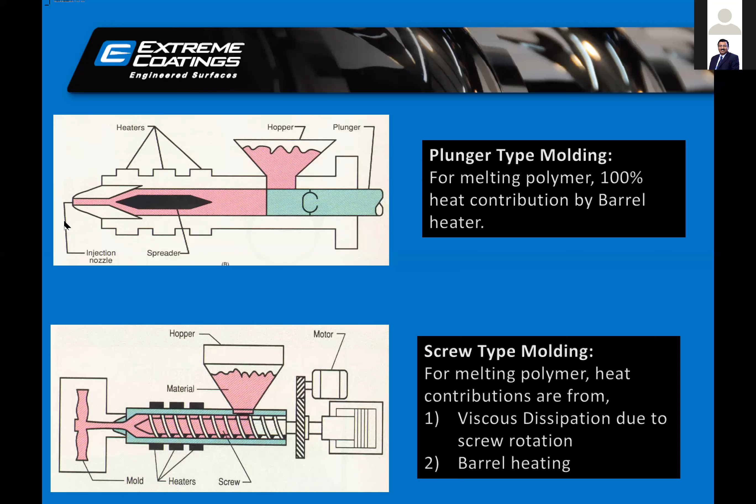Your motors, your drives, everything is subordinate to this system. The whole magic is happening here. It is the rotation of the screw which melts your polymer and creates a quality melt polymer, which ultimately gets converted into the end products.

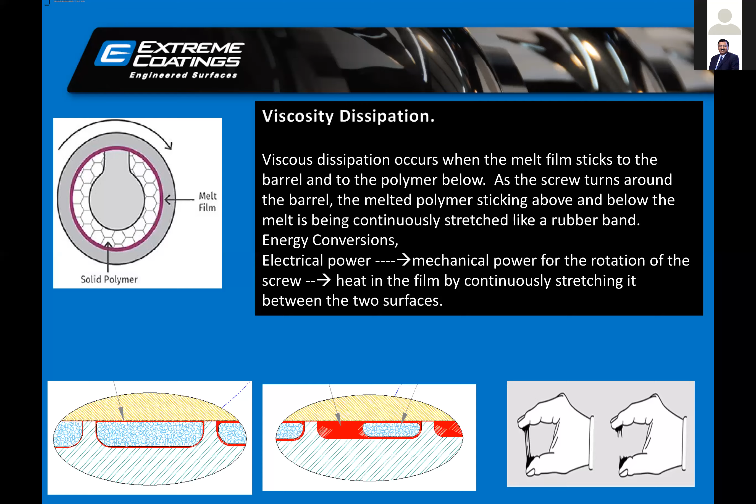Now what is important in these screws and barrels? If you look at the screw barrel system—and I'm just giving you a very standard idea, maybe a different machine supplier has a different formula for it, but this is more in general—if you have a barrel ID, let's say d, the clearance should be the screw barrel clearance. This is where your polymer gets melted. It should be d into 0.001.

That means whatever the ID of the barrel is, you multiply it by 0.001 and you get your clearance. There are two types of clearance, and when you subtract it from your barrel ID, that's where the OD of your screw comes in. So just to brief you, if your screw barrel ID is 30, then the clearance is 0.03. 0.03 into 2, because this is just one side clearance, total clearance will be 0.06, and this will become your screw OD, 29.94.

Now there is a term called critical point. What is critical point? It is the point after which the machine does not give potential profit, directly or indirectly.

What it means is, either your output of machines will decrease, or the quality of melt will not be good. You may end up having black marks, silver marks, or all kinds of issues in the melt.

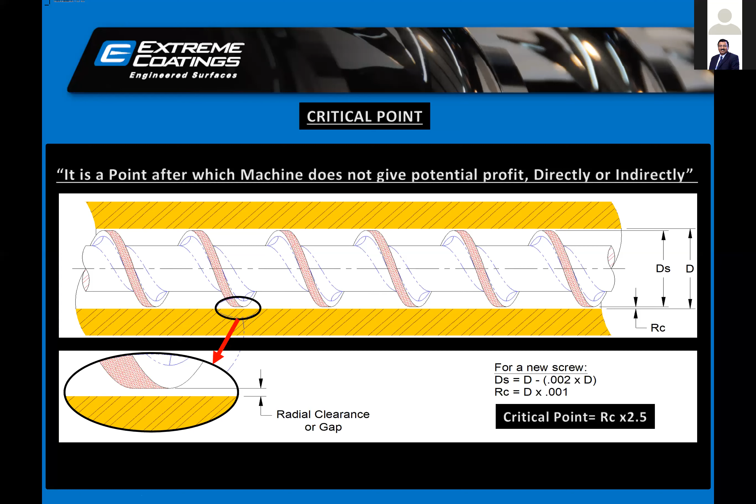So what is the critical point? The clearance which you calculate - once that clearance becomes 2.5 times, you have to make sure you pay attention to your screws, do rectification, or you may have to go for new screw barrels.

So what are the critical points of typical diameter? If your barrel diameter is 30, if the OD of screw or clearance of the screw barrel system is more than 0.07, please pay attention to it, because now your output may get reduced or the quality of melt may not be good, which ultimately will affect your end product's quality. So this is the formula.

And now the question is, why does it happen, why does the wear in the screw barrel systems actually occur?

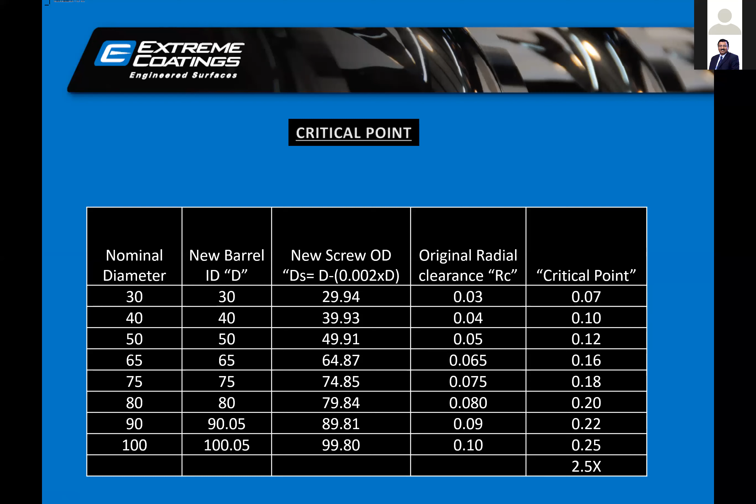So this is what happens beyond the critical point. If you are an extrusion machine processor, the overall output will get reduced. You may have degraded particles or inferior dispersion. In injection molding, you may end up with refilling time more than cooling time, so your cycle time may get increased, and you may have degraded polymer. So we all know all kinds of issues we may face once the screw barrel system is not in place.

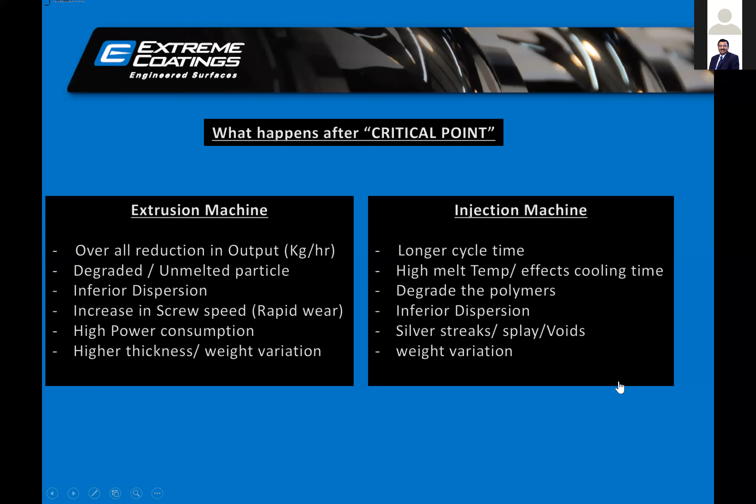I don't want to get into more specifics, but let me brief you about a customer - this is a live example. One of our customers was having a 68/28 twin screw PVC pipe machine, and the target output - when they first installed the machine, the output was almost 340 kg per hour, and they were having a moderate fillers application.

They did not tell us what was the filler percentage in that application, and the screw barrels they were using were nitrided. After 1 year, that means approximately after 8,000 hours of production, the same machine was giving output of 315 kg per hour. So on average, when we calculated the output loss into hours into 365 days, this was the production loss of that particular machine - 98,000 kg, which was actually 3 weeks of actual production of that machine. So almost in a year, almost 21 days the machine was not functioning.

That was the kind of loss that processor was making.

This again is a live example of one chair manufacturing company in Durgapur. Because of the wear, the cycle time of the chair, instead of 45 seconds, became 47 seconds, and almost on an hourly basis they were manufacturing 4 chairs less. And you can always calculate the back end cost and the loss the company was making because of this.

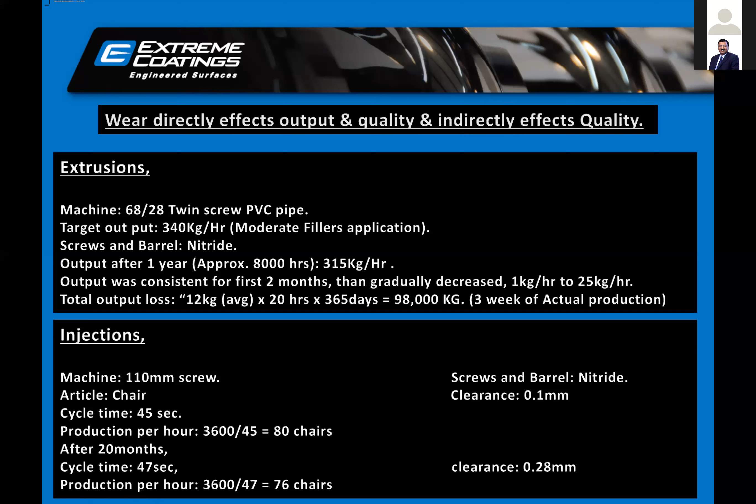Coming back to the wears, we have to understand what are the wears in the system. In plastic machineries, because the system is such that you always end up having a screw assembly as a cantilever assembly - that means one end of the screw is always going to be free - and maybe because of the filler, maybe because of the higher diameter of screw, different heat mass at the systems, it is bound to happen that two metals are going to come in contact with each other.

That's what we call adhesive wear. See, in adhesive wear, when you purchase new screws and barrels, the surface may look very smooth, but in microscopic view, the surface has peaks and valleys, and when two peak points come in contact with each other, because of the higher shear, they create a micro weld.

That's how, if you see specifically in most systems, the wear starts at the metering zone, because that's the area which is more free for movement, and those are the areas continuously in touch with the barrel, and it starts getting ruptured from that end. So most of the time in all these systems - be it injection molding, be it extrusion molding, small screws, big screws - this adhesive wear is always there in the system.

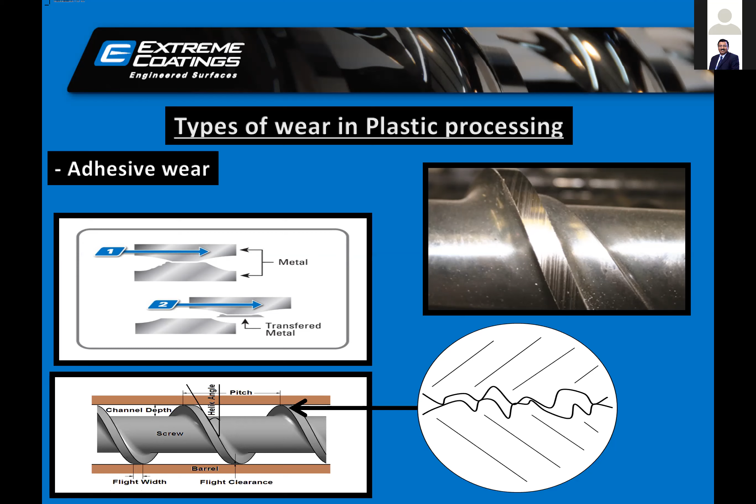There are many reasons for that. As I said, alignment - because it is a cantilever assembly, sometimes runouts on the screws are more, and the deflections could be more because of the weight of the screw itself.

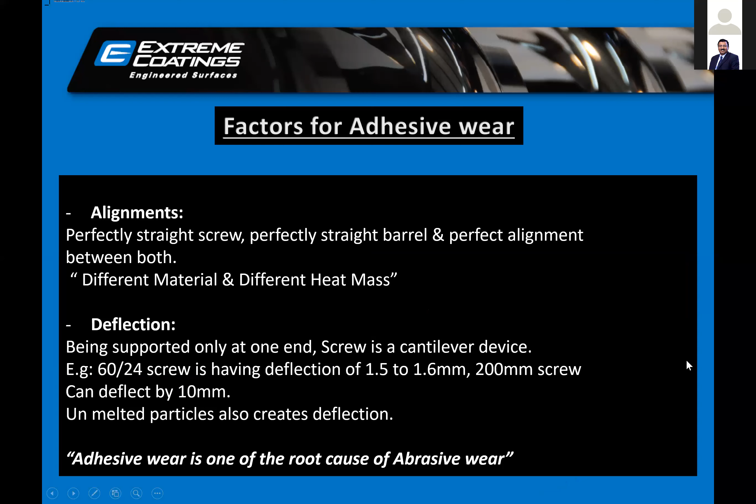Second kind of wear is abrasive wear. This happens because of the fillers and other subordinate materials we have to add in polymers. It could be glass fibers, calcium carbonate in PVC applications. Maybe customers are processing recycled plastics which has lots of dirt and dust, or agglo waste, which is roadside waste - if customers are collecting it, it may have lots of dust particles. Now, what is abrasive wear? When hard particles come in between the screw and barrel, and if the hardness is not proper, then you will see lots of wear on the screws.

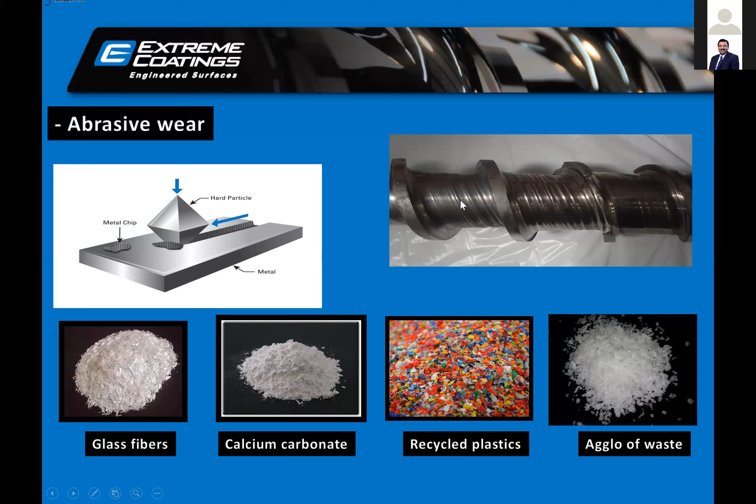Another kind of wear is corrosion wear. This typically happens when you have acidic materials. We usually see this in PVC and CPVC applications where chlorine can attack the base metal. Then in PTFE processing, fluoric acid can attack your base metal. Lots of engineering plastics used in automobiles have halogen-free flame retardant, which is very corrosive in nature and can also pit your base metal.

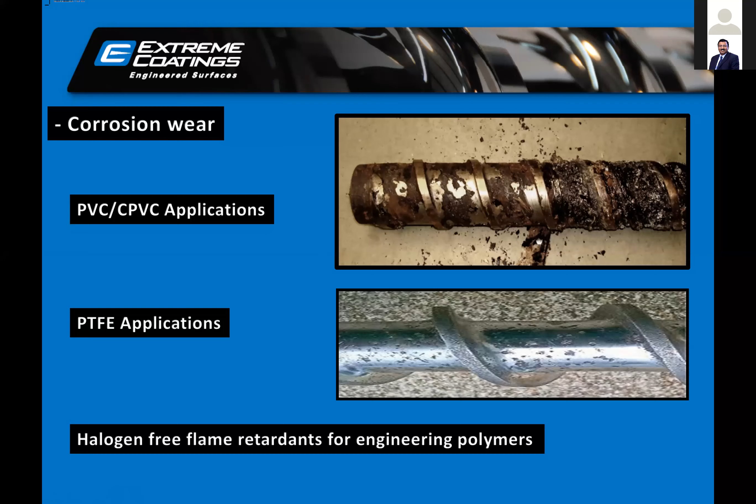Fourth kind of wear, which has come into picture in the last 6-7 years, is called erosion wear. This happens when customers are using groove-feed screws and barrels. If you see simulations of the screw very near the hopper, this extrusion system feels lots of pressure. The sidewall of the screw has so much pressure that within 6 to 7 months the flights are almost gone. This happens in groove-feed systems where very high feed rates generate lots of pressure.

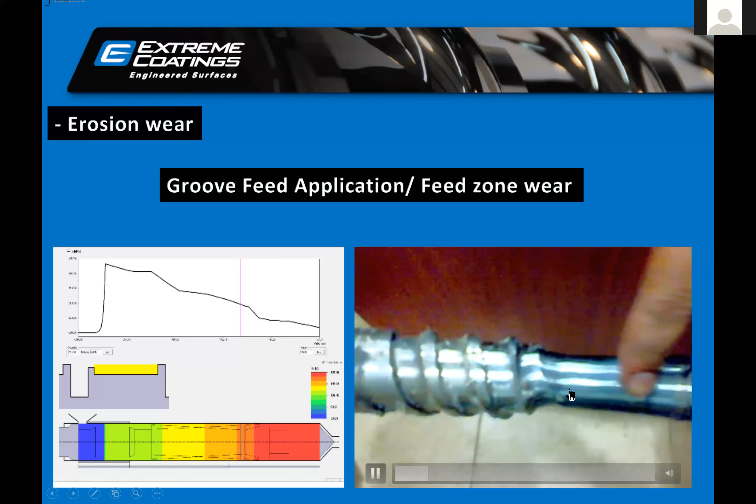I'd like to play a small video here because this is not commonly seen. The real problem is only in the feeding zone. If you see just near the feed zone, almost 3 to 4 flights are completely gone, and this happens because of very high pressure at the feed bush.

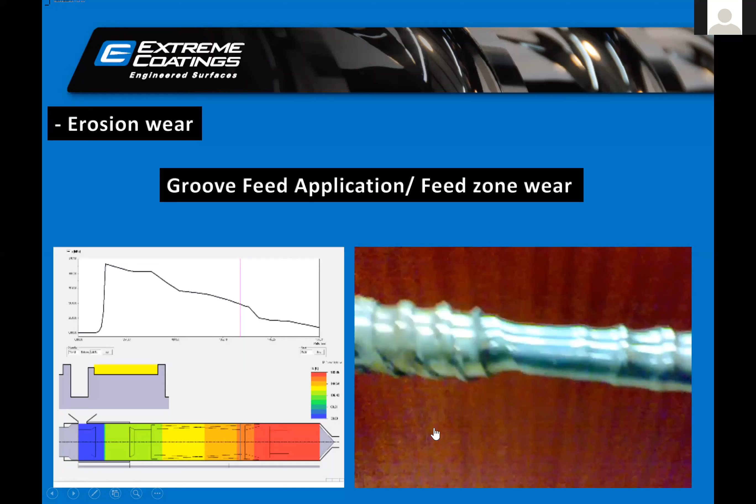I will not run the complete video because we may run out of time.

Now the next slide is basically about what industries have done to combat this kind of wear. There are two ways industries have tried to address these issues. One is with the steel itself. In the 1960s and 70s, plastic processing was not that advanced, but in the 70s in the US and Western markets, the automobile market got such a boom that there was a need to convert metal parts into plastic parts, adding toughness and strength. People started using fillers and similar materials.

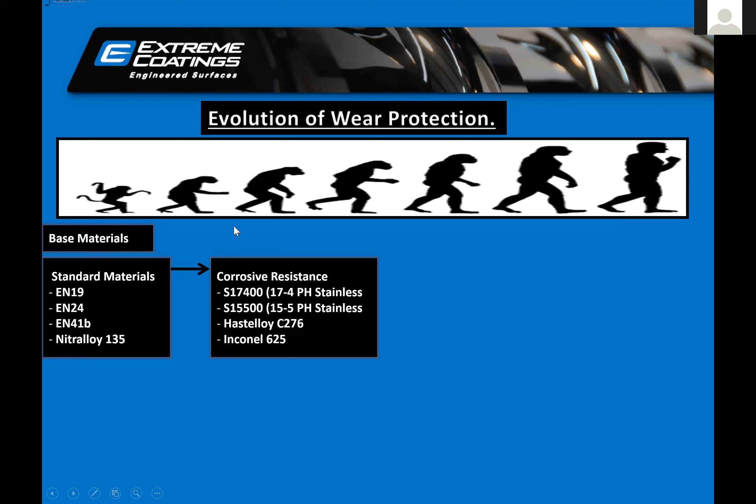In that case, simple steel may not sustain, so some advanced steel came, like 4140, 4143, and you can put some treatments on that. Then there are certain steels specifically used for corrosion resistance - for example, if I want to use CPVC only, there are specific steels you can use to make screws and have a longer life compared to standard material. Then industries started using steels which are moderately good with adhesive wear, abrasive wear, and corrosion wear also.

Those are H13 and D2. And then came very special steels, mainly used in the European market - CPM 9V, CPM 10V. The steel of these particular screws is tailor-made; the technology itself is called crucible powder metallurgy. They make powders of it, and from the powders the steels are made. So this is one way industries have tried to address the issues of wear.

Second way industries have tried to address this issue is by putting surface treatments on the screws and barrels. The very basic one is flame hardening - if you put heat in the steel, it will do something, and there is a technique for that. I'll speak a little more briefly on all the steels as well as the surface treatments.

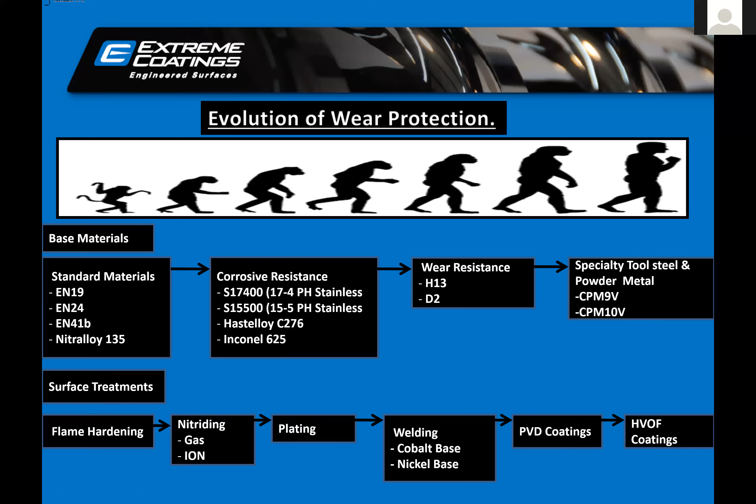After flame hardening, people developed nitriding. After nitriding came chrome plating. After chrome plating came weldings. After weldings, people started doing PVD coatings, and after PVD coatings, now HVOF technologies are available, and we will look at each and everything briefly.

Keep in mind that when you purchase steel, steel is a mixture of different elements, and some elements are very good for steel, some elements are very bad for steel. Carbon puts lots of hardness in steel, but there is a limitation. If you try to put more carbon in steel, it will become cast iron. So there is a limit to this.

Manganese, phosphorus, sulfur, these are all basically impurities we want to avoid. If you have high chromium in your steel, it will become more resistant to corrosion. If you have molybdenum, vanadium, tungsten carbide, those steels are excellent. They give great life because these elements are very good at corrosion resistance, wear resistance, abrasive, adhesive, let it be any kind of wear. These elements help a lot.

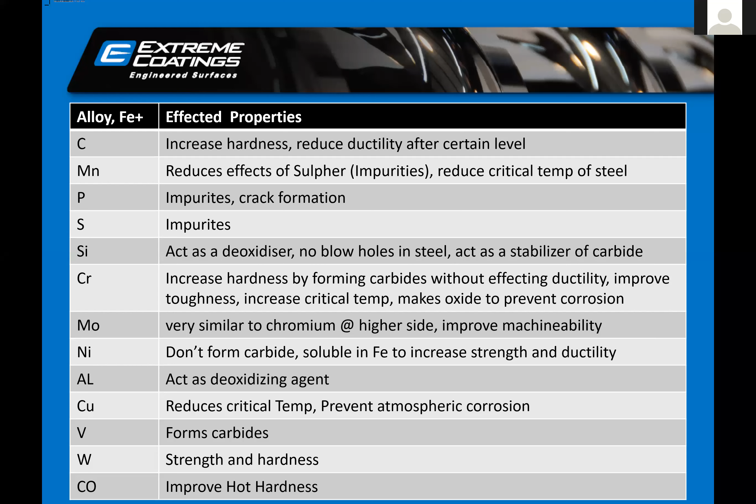When I spoke about standard materials, 4140, 4340, and all those things, in India we call it EN19, EN24, EN41B. 80% of the machines you purchase in India use these steels, and then nitriding is done on those steel. This is very standard in India. If you look at the chemistry, it does not have great wear resistance property. It is just a steel which is ready to accept nitrogen, so it can make a nitride. That's how it creates the hard layer. But this is a very basic steel.

Sometimes you may wonder why one screw maker gives a much cheaper cost for the screw barrel, while other screw makers give you a much higher cost for the same screw barrels. This is because of the material itself. EN41B is almost 2 times costlier than EN19, but the chemistry is very different. So steel may look the same, everything looks the same, the hardness initially looks the same, but the steel chemistry is not the same. EN19 compared to EN24 is better; compared to EN24, EN41 is better. Nitralloy 135 is a specific steel used for nitriding, so it is even better than that.

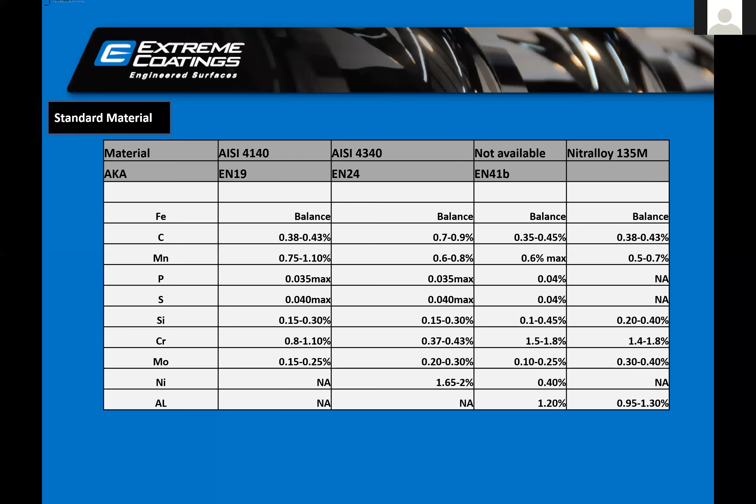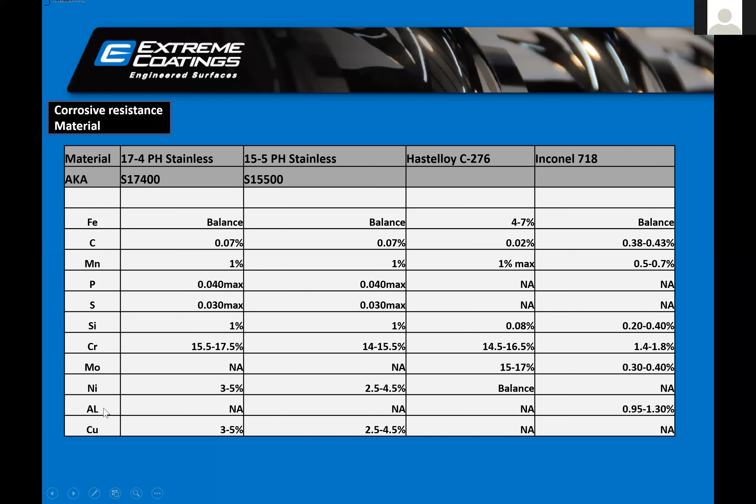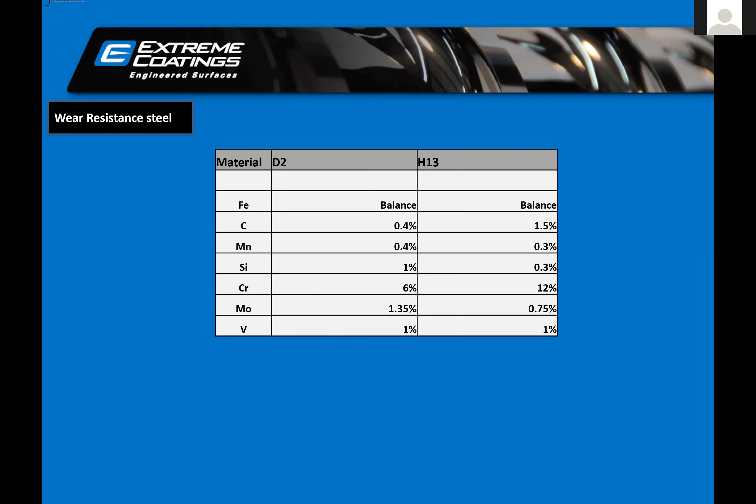Next level, as I said, there was D2 with some percentage of molybdenum and vanadium. So it gives moderate resistance to corrosion, moderate resistance to the other two wears which we spoke about, adhesive and abrasive. But the limitation with these steels is that you cannot make bigger size screws. It's very difficult to remove the runout from those screws. So up to 36mm, 40mm, this is advisable. Yet this is not a foolproof solution.

The fourth kind we spoke about is powder metallurgy. This is very common in the US. This is the steel they use. The vanadium percentage is very high, 9%, 10%. Molybdenum percentage is also a little bit there. Chromium percentage is also there. So when it comes to steel, this is the best that is available. Beyond this, there is nothing available. So if you want to purchase a steel which is wear resistant to all three of these, then CPM 9V, CPM 10V is the best solution in terms of steel.

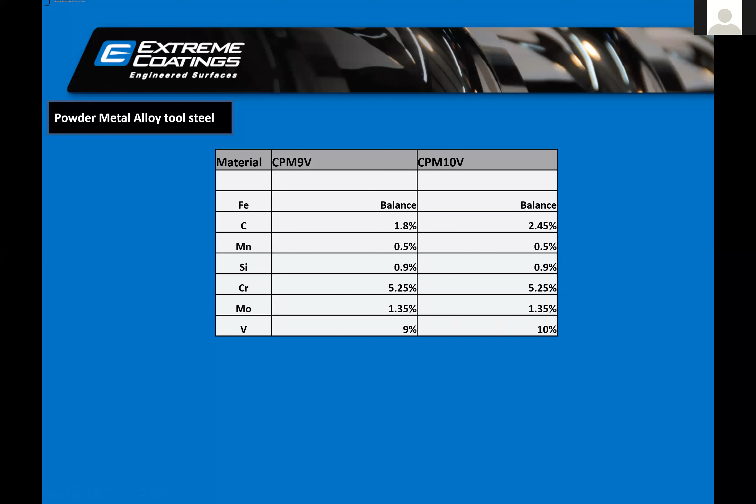When we talk about surface treatment, the very basic method from the last almost 50-60 years that people have used is flame hardening. When you make the screw, if you take it to a certain temperature and quench it rapidly, it creates a hard layer on the top surface, and that's how the life of the steel can be increased.

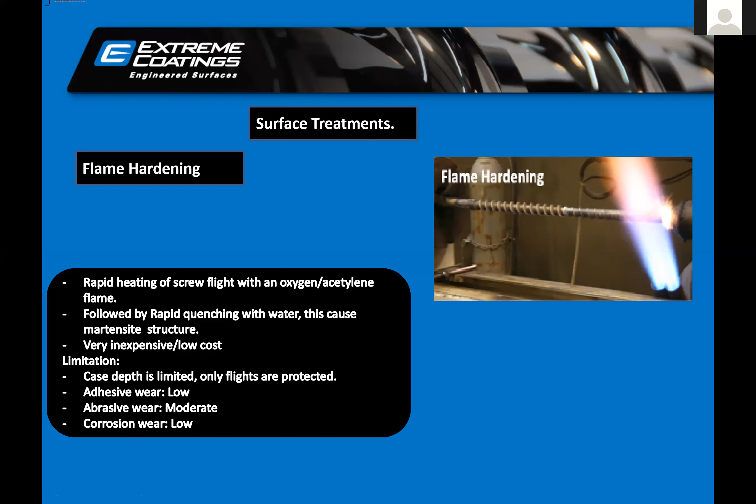The second method is very famous and very common in India. Basically, you can take EN41B steel or Nitralloy steel and just nitride it. It will create almost 30-40 microns of hard layer on the screw. The limitation is that once this hard layer is worn out, which happens within 3-4 months, then your soft screw is exposed and it wears out very quickly. Also, it does not give wear resistance against corrosion, it cannot protect there. It requires different attention.

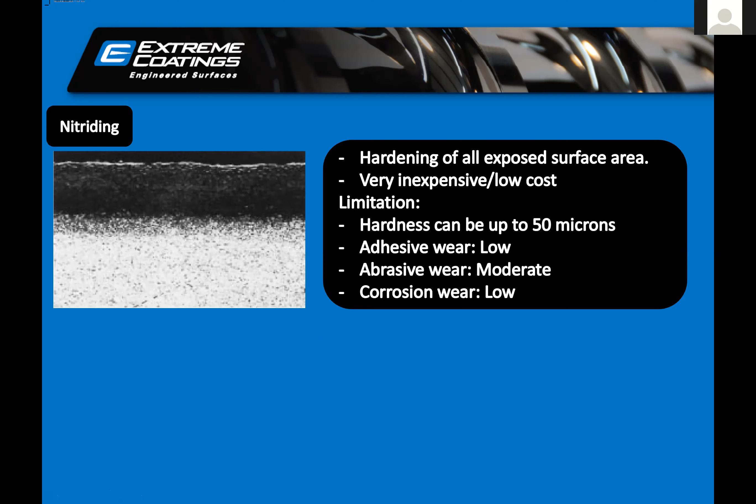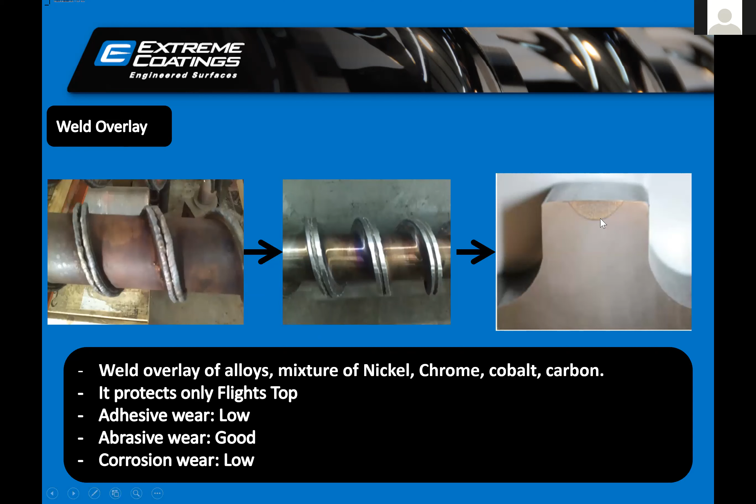Weld overlay is what Indian processors or machine suppliers buy from outside India. It's a vast subject, but briefly, a groove is made on the flight top, and then the welded material is put here.

What welded materials are available? The very basic is Stellite 6. You may often hear from Indian screw suppliers that they also do bimetallic work. Technically they are correct, they do welding of Stellite 6, but the tungsten percentage in that is only 4.5%. Then there are some Chinese and Taiwanese companies who give a little bit more compared to Stellite 6, known as Stellite 12, where the tungsten percentage is almost 8.3%. This is better than Stellite 6.

Then came Colmonoy 56, where the chromium percentage is very high and the balance is nickel. Again, it's a semi-advanced technology. And the very best bimetallic available was Colmonoy 83, where the tungsten carbide is almost 25%. This is what most machine suppliers mean when they talk to you about bimetallic screws, this is what you are purchasing. This is not easily available in India; most Indian suppliers are importing it from various parts of the world.

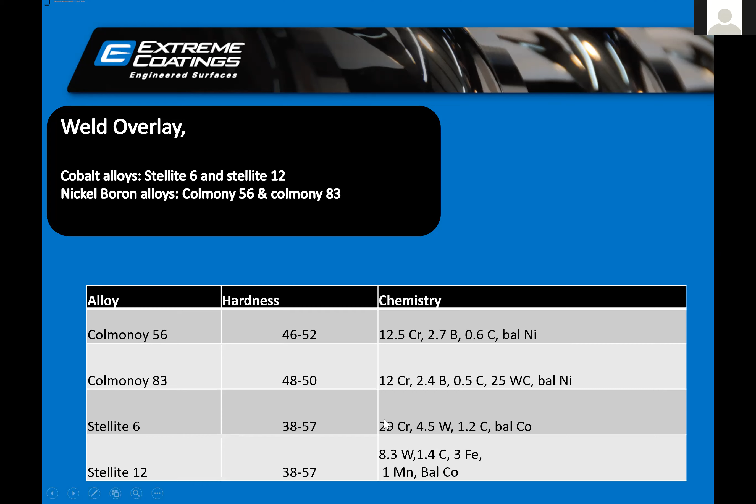Sometimes some processors or machine suppliers use a combination of all three things. It may be weld overlay chrome plated, or it could be nitrided and chrome plated, depending on how they want to improve the situation.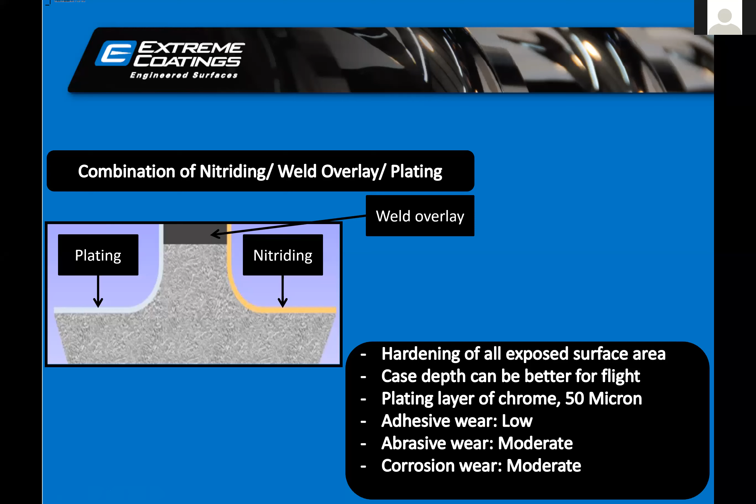Then came the coatings. With coatings, there is one advantage: not only the flight top, but with coating you can cover the entire surface of the screw.

Initially, if you go to China, you see many yellow screws hanging there in screw stalls. Those are nothing but PVD coating, these are titanium nitride. With this process you can go only up to 40-45 mm. The system is not developed, it is not up to that advanced level.

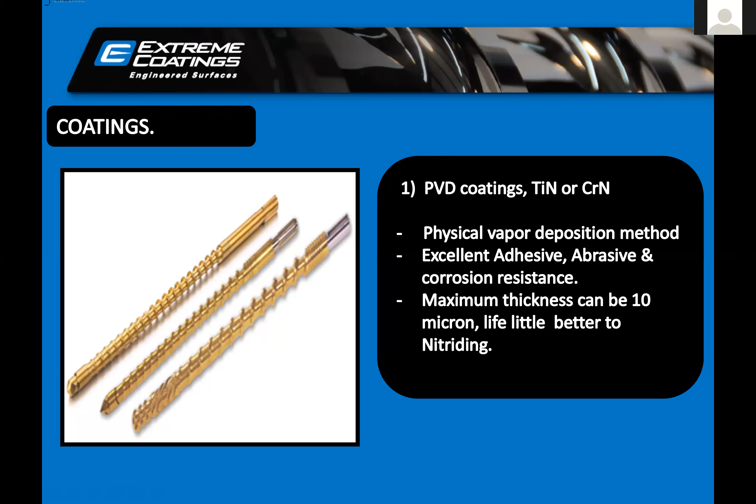Second, once the coating layer is gone, the soft screw underneath is exposed and it will wear out very quickly. In the advanced stage of coating, and this is what my company does, we are Extreme Coatings. We give tungsten carbide full encapsulation coating, and this is the whole mechanism. I don't want to go into the details because we have very limited time.

So what happens here is a high velocity oxygen fuel flame is generated, and the tungsten particle is poured from here, and with very high strength it gets embedded on the steel surface.

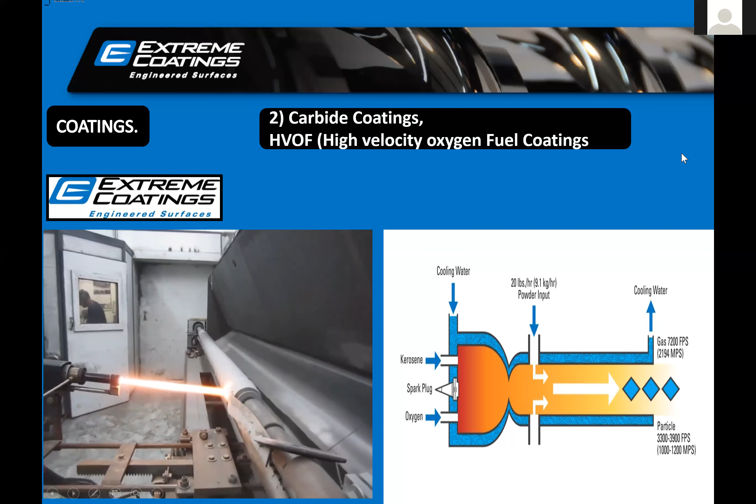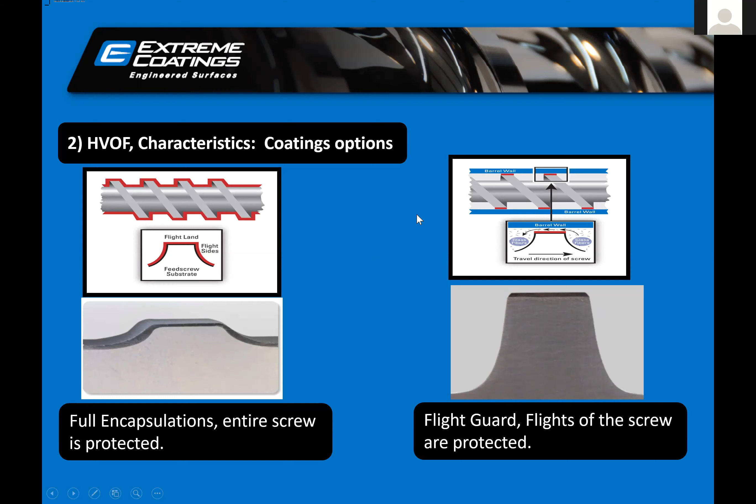Now what is the advantage of this? There are two advantages. One, if you are looking to protect only against abrasive and adhesive wear, which mainly happens on the flight top, we can put coating only there. And if you have polymers which require attention on all three aspects, corrosion, abrasion, adhesive, then we have full encapsulation also, where the tungsten carbide layer can cover the entire surface of the screw. So one is called flight guard, one is called full encapsulation.

Another advantage is that unlike PVD coating, where only 10 micron coatings can be given, here we can go 125 micron per side, up to 250 micron per side. That's the capacity of the technology. We can put a much higher layer of tungsten carbide on the top of the screw as well as on the sidewall of the screw.

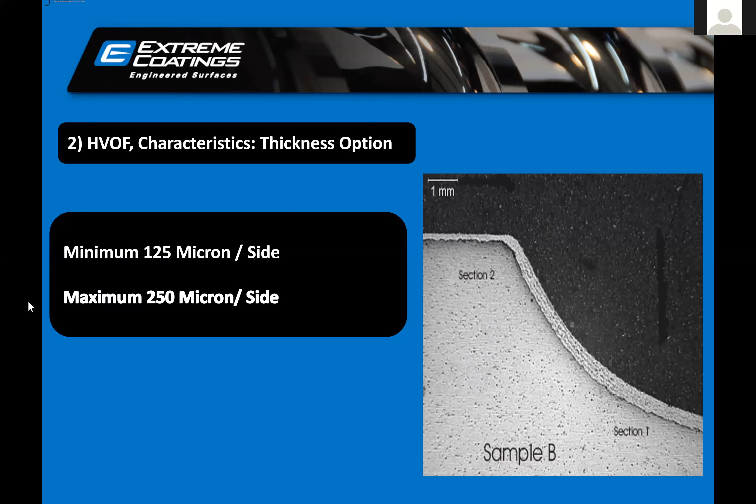Third advantage: the most advanced bimetallic technology had 25% to 30% tungsten carbide. Here, the powder we use is 88% tungsten carbide, which is almost 3 to 4 times better than whatever was available globally. So actually our coating is considered a super bimetallic coating, which gives double the life of bimetallics. Globally, the tungsten coating is considered a super bimetallic coating.

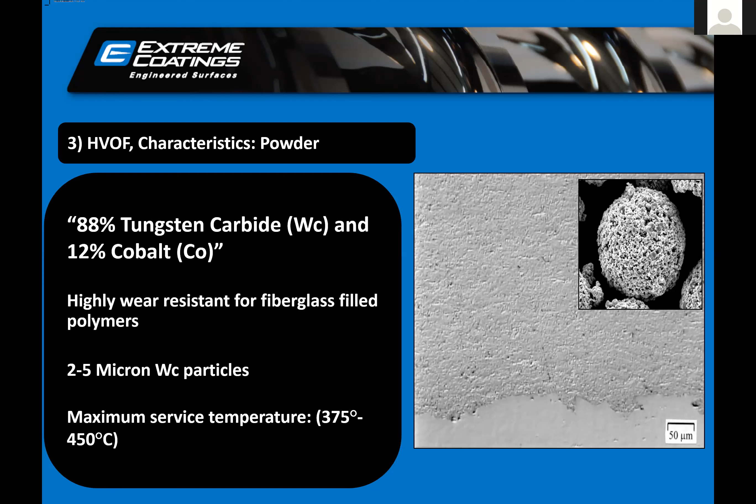There are some more advantages, I will speak about them in the next slide. But when we compare these coatings with what is best available for corrosion resistance, if we benchmark it with hard chrome plating, the hardness is almost the same. So when we say we have 88% tungsten carbide, that doesn't mean it makes the screw very hard, it is still within the range required in that system.

But the wear resistance is very powerful, and the bond strength is very high. The porosity is less than 1%, while in hard chrome plating there is lots of porosity. Let me explain what porosity is.

Chrome plating porosity is more than 6%, and that's why some suppliers use triple chrome plating, because one chrome plating is not enough - it may have a lot of porosity. While in our coating, the porosity is almost less than 1%, in fact 0.5%, so there is no chance of acid entering the base metal.

This is the cross section of our coating, and this is the base metal. You can see there is hardly any porosity in the coating.

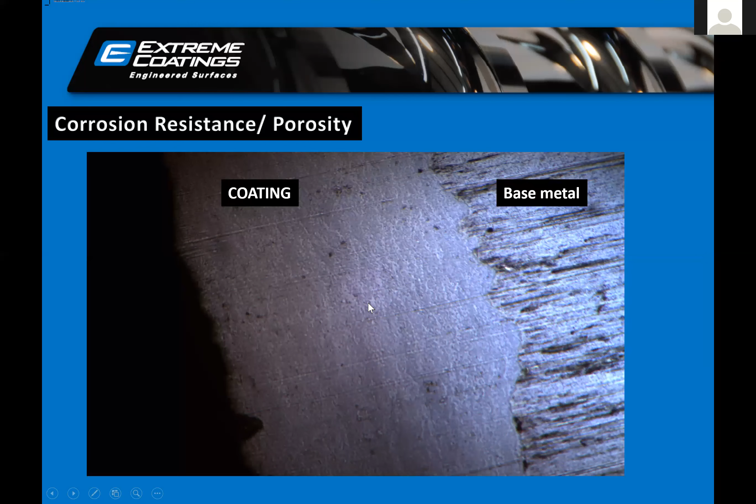Another benefit - this is a test available in the market, ASTM B117. If I have a coated piece and a chrome plated piece, and we submerge them in an acid tank, within 55 hours the chrome plating is completely gone, while for tungsten coating to get corroded it requires 720 hours. So you can understand the corrosion wear resistance it has compared to any chrome plating solution.

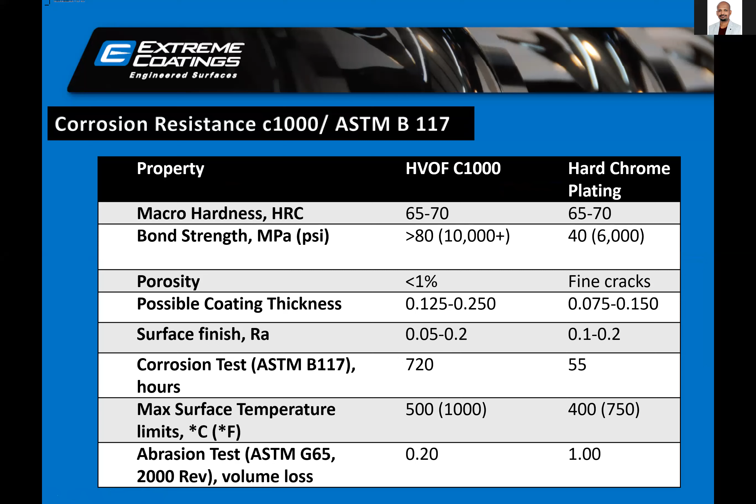I will go in depth, or give some idea, of its abrasive wear resistance also. So when we talk about this...

So these are the results of abrasive wear, compared to Nitride EN 41B, Stellite 6, D2, or Colmonoy 83 - coating has a higher life. In this test, you can check on YouTube also how the ASTM G65 test is done. This is just to give you an idea.

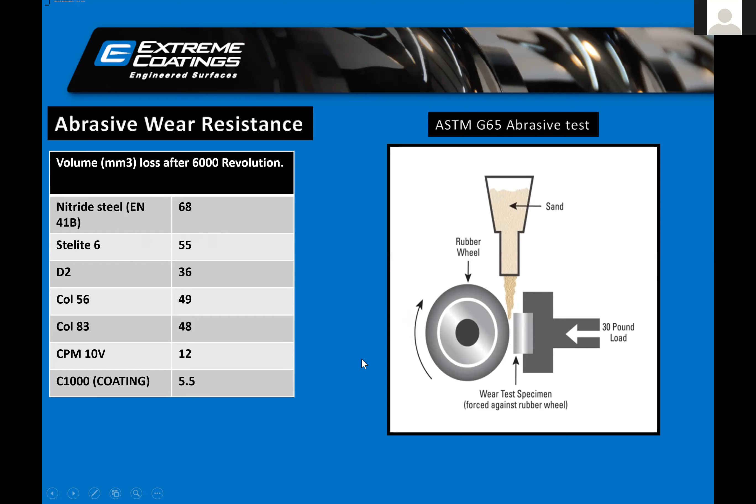When the volume of the piece lost is measured, the nitride has lost almost 68 mm3 of volume, while the coating has lost only 5.5 mm3 of the volume. Maybe I can share this video later also.

And this is another test to check metal to metal wear and how it's performed. Again, compared to any other solutions available, the volume loss in our coating is minimum, very less.

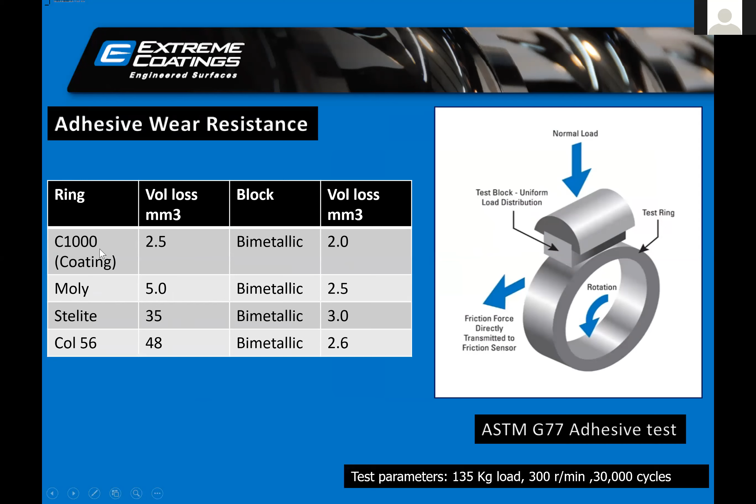So what does this mean for customers? If you are a pipe processor, twin screw processors, you can take our OD coating on the flight top, and if you are getting 8,000 hours of life, this may definitely give you 3 times the life of whatever you are getting from the nitrided screw barrel.

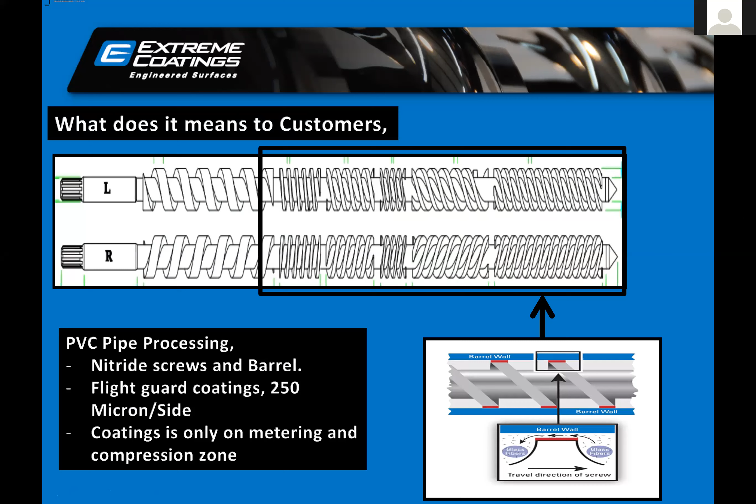Some live case studies we have mentioned here. When a customer used to have only 7,000 hours of life, the coated screw has crossed almost 15,000 hours. Some of our customers from 2012, 2014 - the screw barrel is still running, they have not taken it out from the system yet.

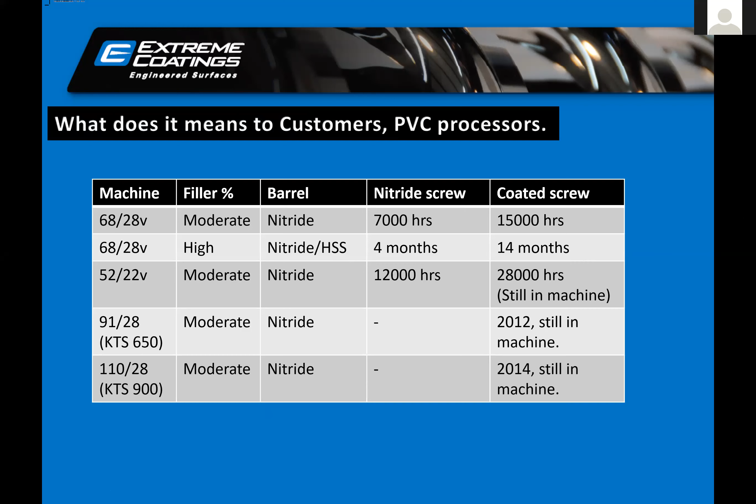If you are film processors, we can give a full encapsulation at the feed zone to avoid any erosion wear.

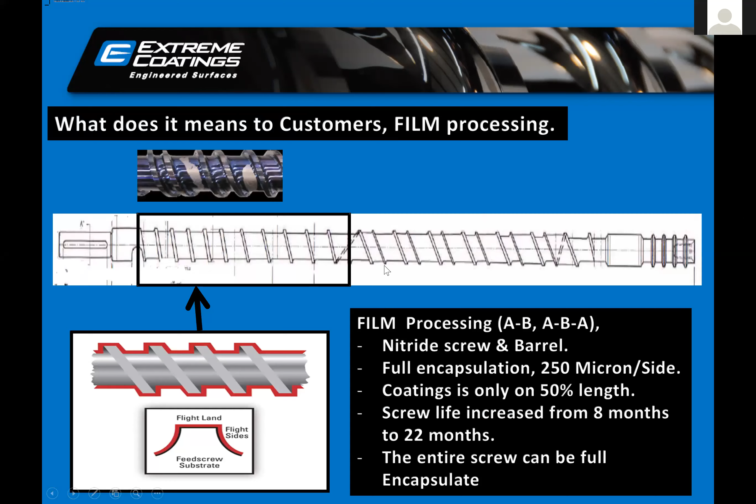If you are injection molding processors, this is a case study compared to D2 plating. They were taking only 3 lakh shots. With CPM 10V, they got 10 lakh shots. With coated screw, they got 40 lakh shots. So this is just a reference of how well it is performing.

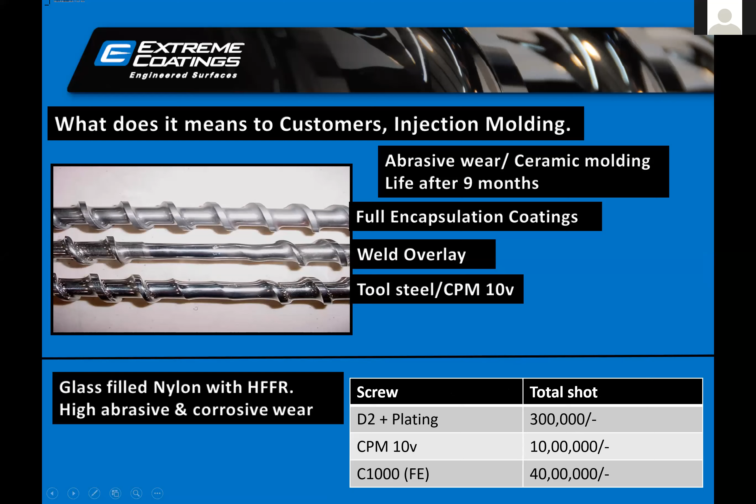So where are we situated - we are a USA based company, it's been more than 40 years now. We are supplying this bimetallic coating globally, more than 50,000 screws we have coated till date.

In India, we have our head office in Chennai, our sales office at Mumbai, and we have a plant in Taloja.

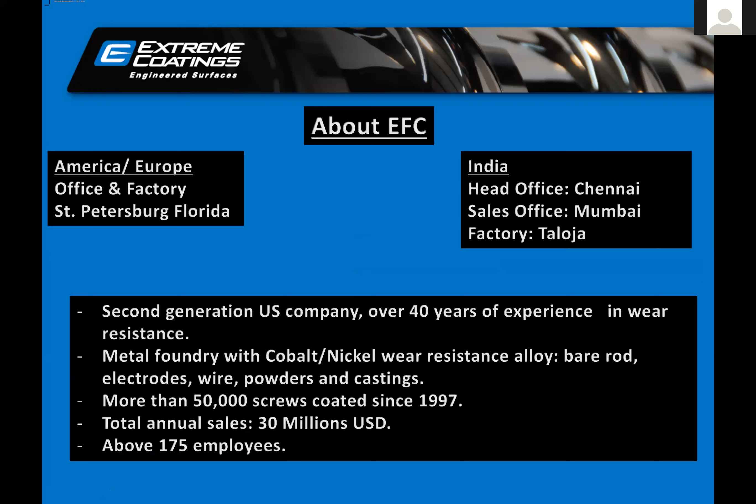Thank you, Desai. It was a very wonderful...